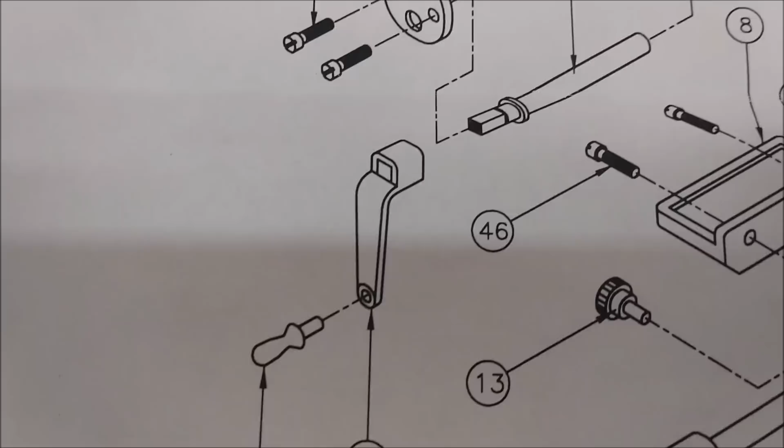Last night I started working on part number 18, this little crank right here in the center. Now, as dimensioned, they're calling out for a 0.100 inch and 93 thousandths on the square. 7 thousandths of an inch doesn't sound like a whole lot, but when you put that together, I just had to roll my eyes and say, what are you thinking?

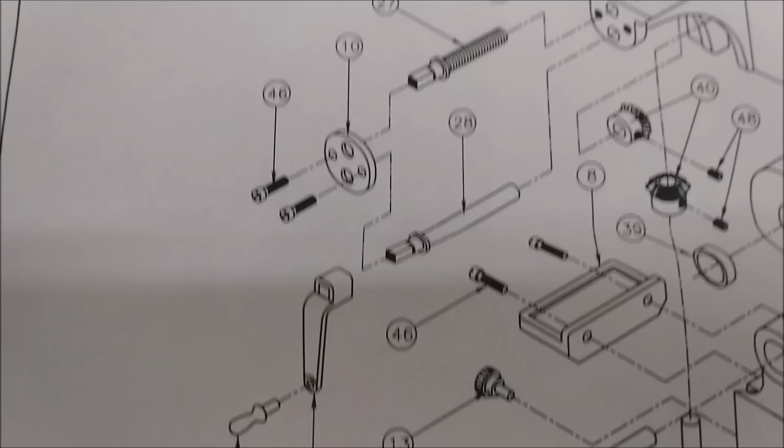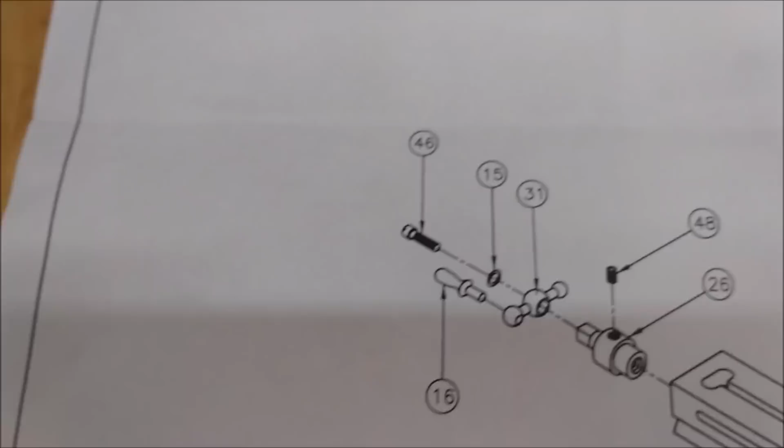So I'm going to show you how it fits, and then we're going to make another one. It's going to be relatively quick, an accelerated video with voiceover, and I'll probably move on to making a pair of 31s at the same time. For those of you that haven't seen how that's done, that's pretty cool as well. Anyway, let's go over to the bench, take a look at how that handle fits on that shaft, and you'll see why I got to make another one. Let's do it.

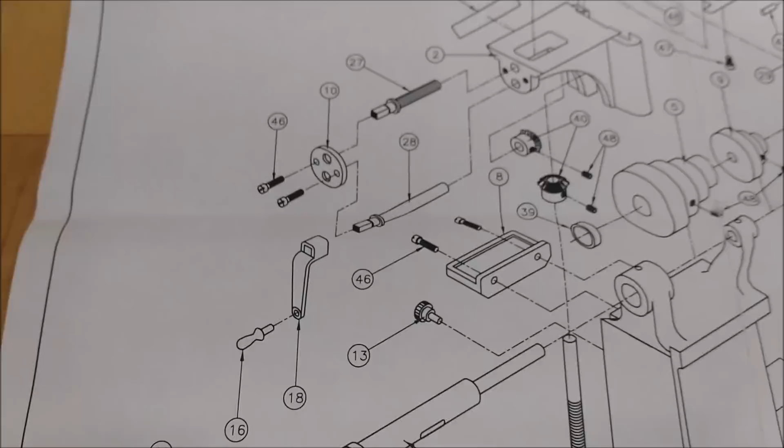Well, there you go. That is a 100 square broach feature, about 200 deep. And that was a Z06 Corvette. You just can't beat that sound.

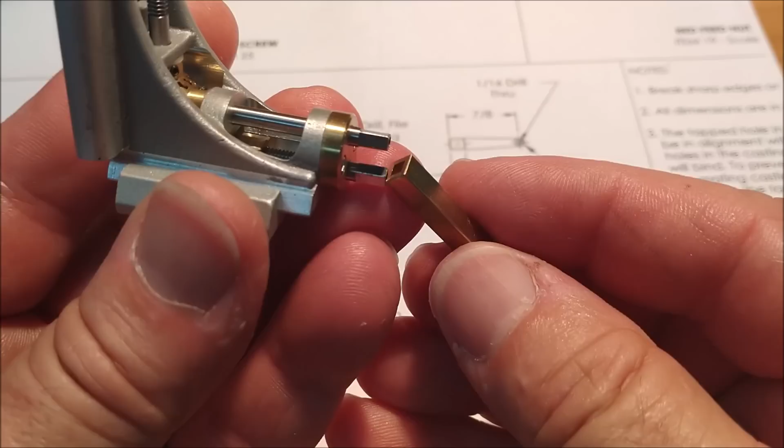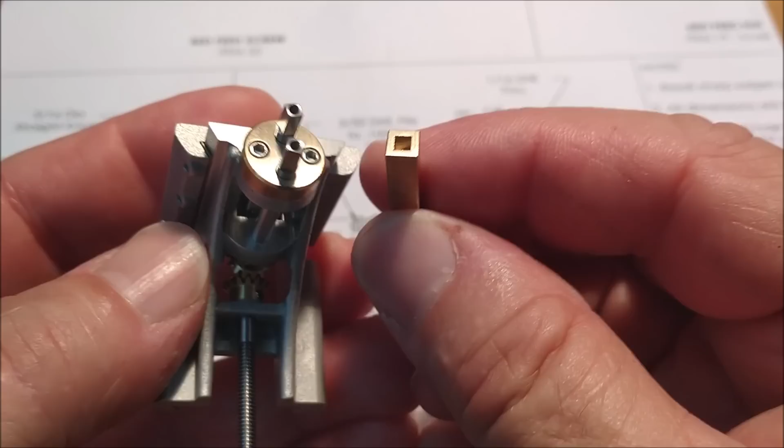Anyway, this goes right on here as the driver once it's all cut and relieved. But you just can't do that. That's just not, no bueno, guys. That's sag - you know, you take away the G and add a D and you got sad, right? So that's how it is. It's nice to test and play with, but at 100 versus 93 on the square, and this is to print, so is this. Just not digging it.

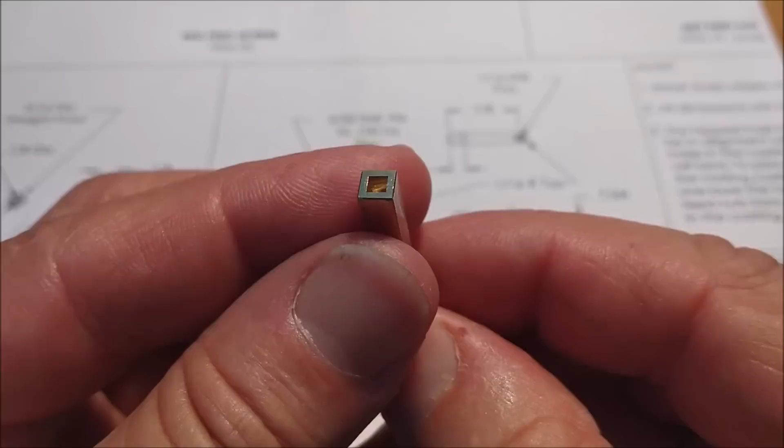So I'm going to make another one at 93. I can use the same broach, but I changed the gauge, and luckily I had some more material left over from a previous model. So let's go over to the mill, squeeze this in a specific setup, drill it, broach it, and then we'll start with all the relief cuts and rounds and such and make some magic. Let's do it.

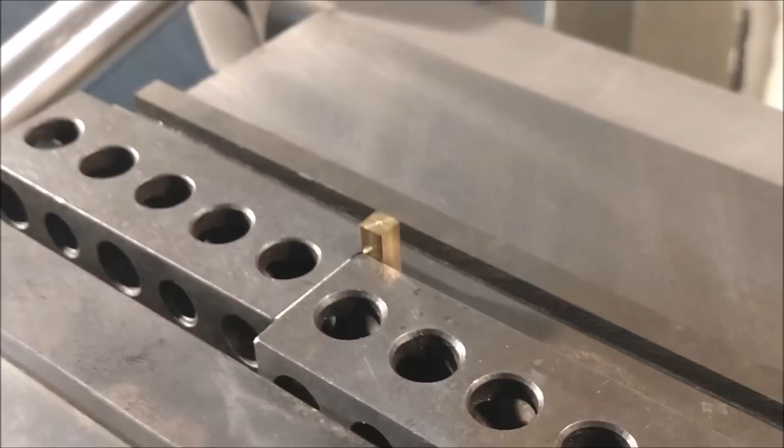Well, to start the process, I'm using a pair of 1-2-3 blocks, one as a vertical reference and the second one as a clamp. All I'm doing in this operation is just cutting the end of the material off. You could also side mill this if you wanted to, but it's nice to have the part oriented so that you can do the most work to it in one setup.

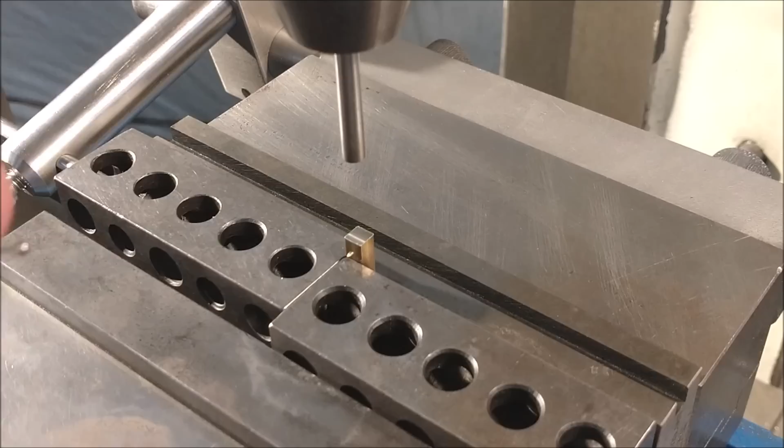Gauge pin in the drill chuck gives you a quick visual reference of how close you are to center with the square material, so that you can get an indicator in there and not be all over the place looking for zero.

Once you register the face, make sure you rock the indicator back and forth to make sure the readings are consistent. Once you have one axis dialed in, if the part is truly square, that's just the number you look for when you move the indicator to the other side. Simply shift the table until you have that number on the indicator, and there you go.

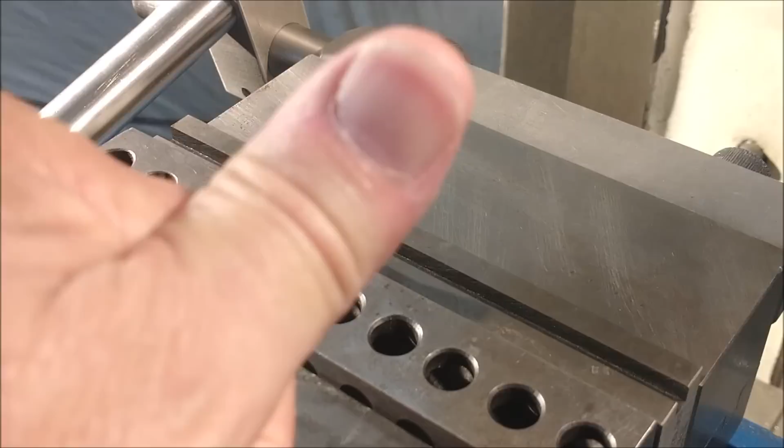Center drill. The drill I'm using here is just slightly larger than the size of the broach. The broach is an 082. That drill was an 089. You can see the little moon shapes on either side. It's a soft material, so it's not a problem with knocking the corners out.

Walking the broach all around, looking for the size that I am shooting for. I'm not sure if this was the 95 or the 94. I do have an 095 gauge, but for the 094 I used a gauge pin, knowing that the profile was square anyway - it just wasn't worth making another gauge. And it fit like a glove. You'll see it at the very end if you stick around right to the end.

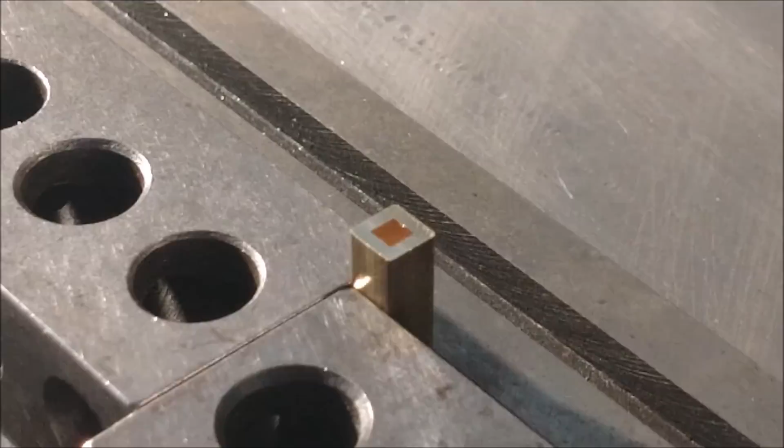I did want to sneak up on it, so I took several passes, making small adjustments each time, because the length of engagement is just too short, and the slightest little bit oversized is going to rock around.

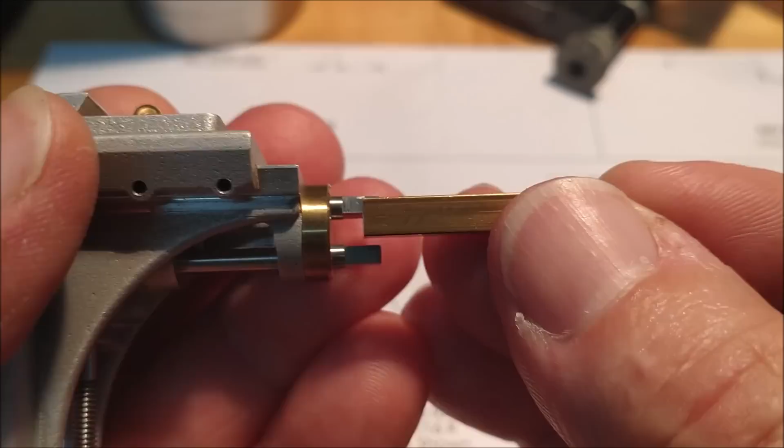Okay, 95. Takes a 95 square gauge. This is 94. I still expect some movement here because of the length of engagement. The smaller the length of engagement, the tighter it has to be in order not to move at all.

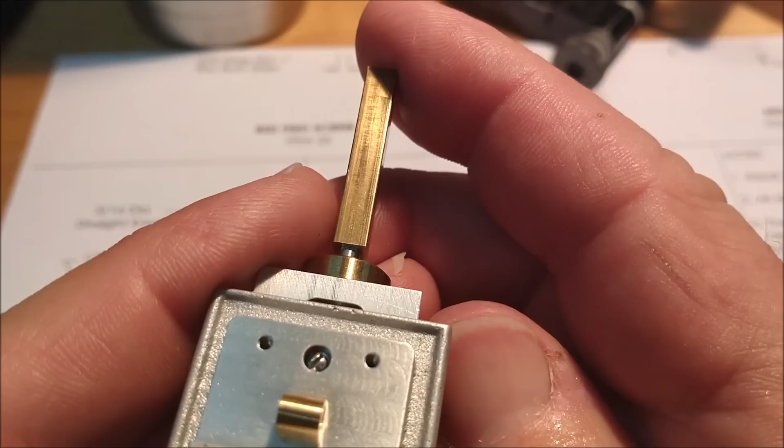So there is still some wiggle in that, and that is to be expected. But it's a whole lot better than it was. As long as it clears the top, clears the bottom, fits them both, we are golden. Let's stick this thing on a fixture plate, neck it down, finish it up.

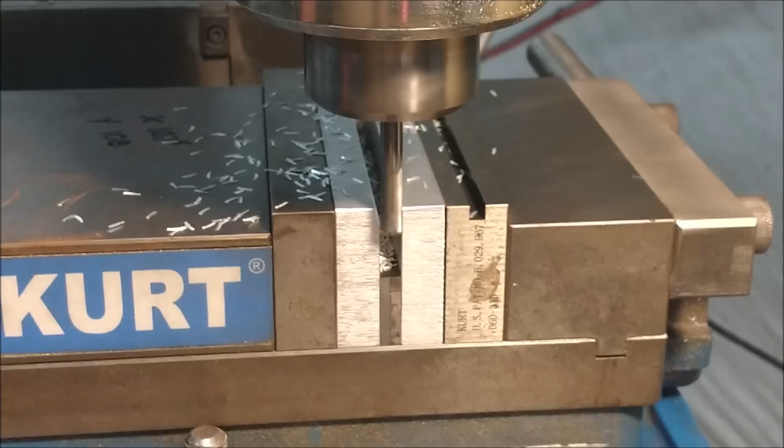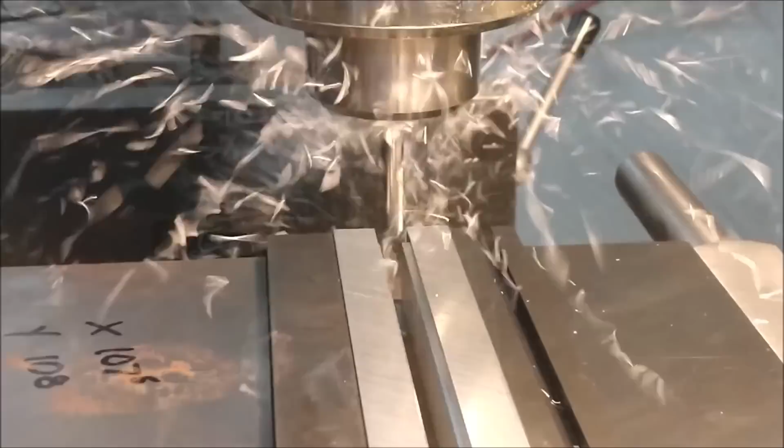I know that the center of this cutter is exactly an eighth of an inch off this back wall. So if I move my cutter, which I will do right now, watch the cutter go that way. I'm going to zero out my Y-axis digital, or your dial, whatever you got. I'm going to go to 125. Go to 120. Let's say 124 and a half. All right, I'm going to zero the cutter.

Excuse me, zero the digital. Right now I know that the center of the spindle is over this back edge right here, so whatever piece of material I put in there, I don't need an edge finder or an indicator to locate the feature that I want to do. And that's going to be a 1/16 hole for the small handle. I also know that the bottom of the cutter against that surface right there is zero. So when I drop the table, I can establish the thickness of whatever part I'm going to put in there. This is also critical. Okay, let's put that little piece of brass in there and see exactly how this plays out.

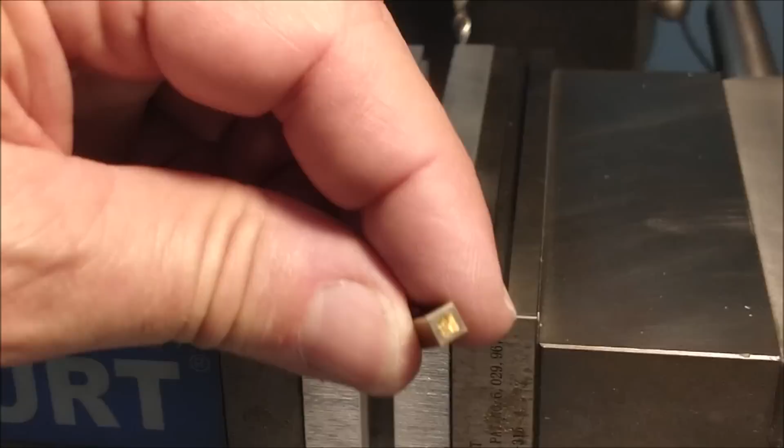If you're going to do something like this, make sure that the top of whatever sacrificial blocks you're using don't protrude above the jaw itself, or they're going to cantilever in and close in a V, and the part's not going to be very secure. So this is just about flush, and the channel itself is just about as deep as the part is thick.

I'm going to lock it in there, and I'm going to leave it locked in there.

The center of this part gets cut down to 43 thousandths of an inch thick. That's pretty small - just over 1 millimeter for those of you that are wondering how big 43 is. So let's do it. Let's drop the table down 43 and call that the new zero for the bottom of the cutter.

For this operation, the cutter was brought down to a quill stop, so I can now safely raise the cutter manually without issue.

And let's get that cutter right directly over that part. I'm going to put some visual reference marks on the part so I can get close before I start taking dimensions.

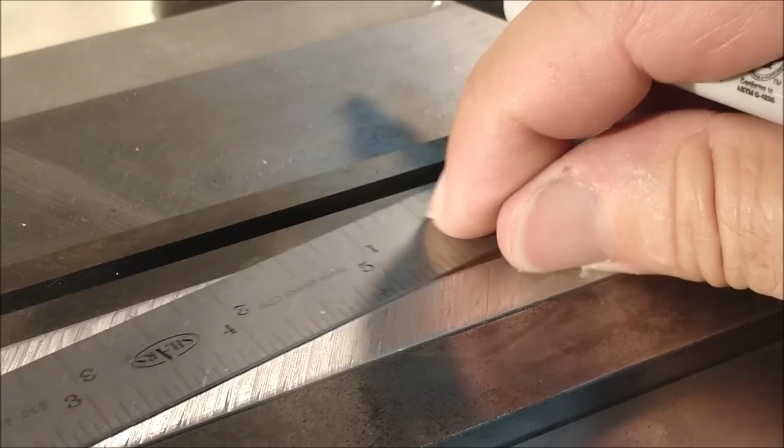Looking for a specific dimension from the end in, and I'm looking for a specific width of that particular slot at the depth preset by dropping the table.

And having the setup like this allows me to go completely across the part into the aluminum. Not a problem.

In this operation, I'm about 5 thousandths shy of where I want to be on the depth of this cut, and I'm just going to push right through the center of it, establish a clean surface on the left-hand side of the part so I can measure it and figure out how much farther I have to go in order to set my zero and my shift locations.

Knowing the diameter of the cutter and the thickness or the width of the channel to be cut, all I need to do is subtract the diameter of the cutter from the width of the slot and just move the table that much.

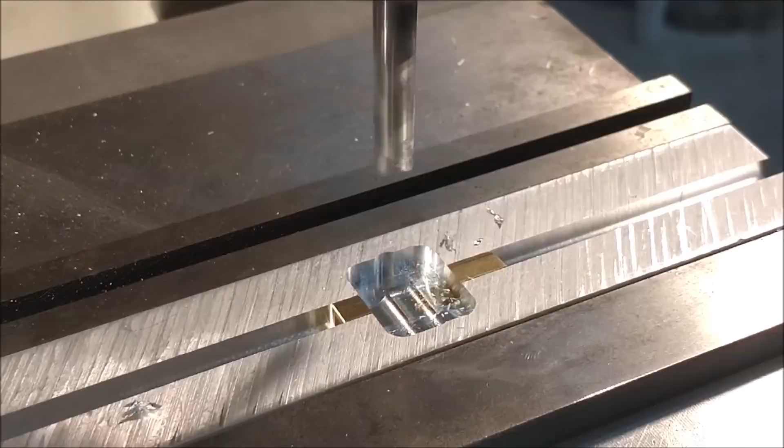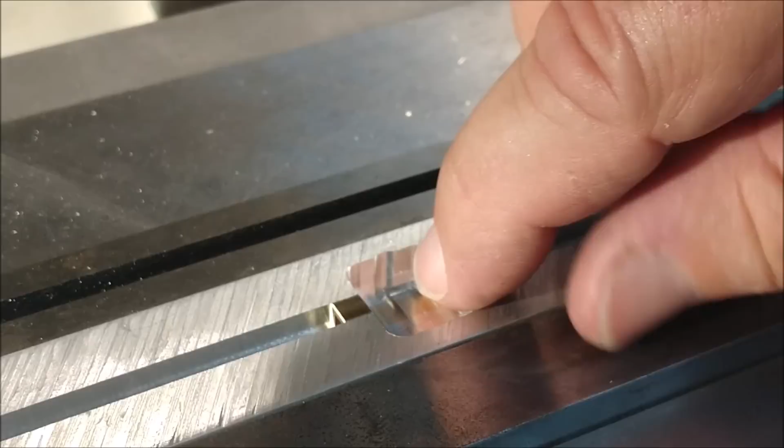I am not going to open these jaws at this time. I'm going to put the crank handle hole in, and possibly use the trepan tool that I used on the little mini U-joint to put the elevated round boss in this area right here. Right now that should be 43 thousandths thick on the bottom and 188 from the face to the inside.

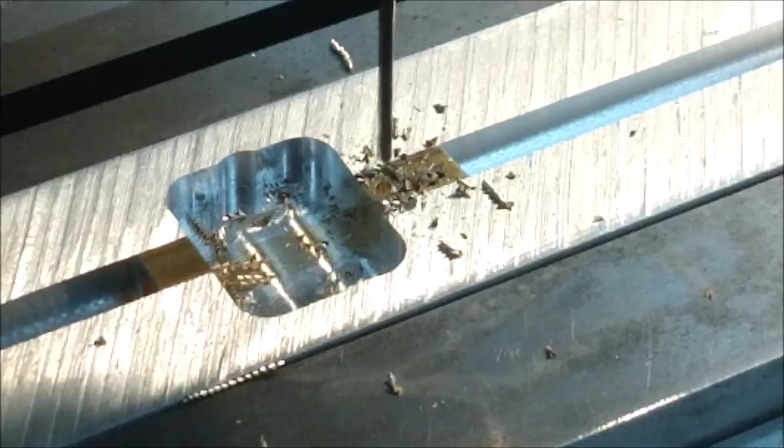625 across here to here. Next step after the pocket is to put the little handle hole in where the knob will go. Center drill first, ever so slight dimple. This is an 059 drill. Gonna go with an 063 reamer to follow. Half the speed, twice the feed.

This is the trepan tool that I used for the mini U-joint. I'm going to just keep on going down until I can see a scuff mark on that nice clean channel that I have in the middle of the part. Might be a little hard to see on film, but when you're sitting right on top of it, you can see the little scratch halo.

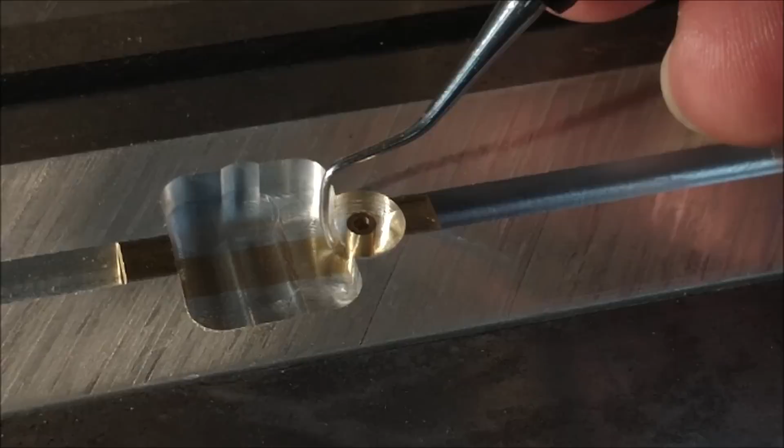The final element I'm going to do here is reduce the height of that boss right there and remove the majority of this stock so I don't have to file it away. We'll go from there.

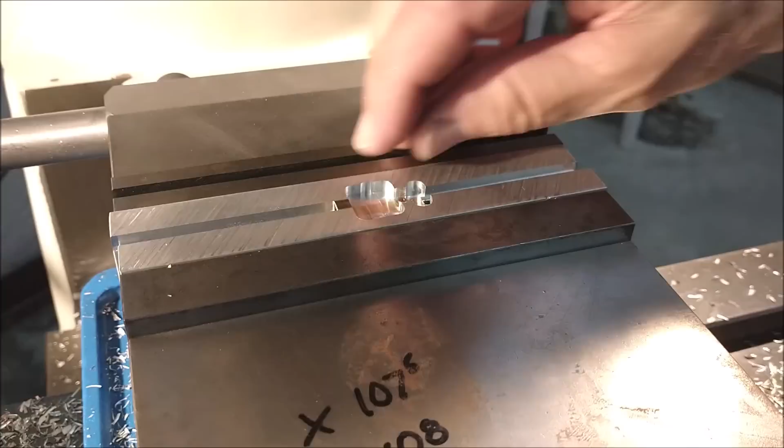All right, let's take a look at it. Still got to put the tapers on the side, bend it. Let's take a look, see what we got.

All right, see, we're right there. Getting close. Let's do some filing. Bend it. Heat treat it though too. Definitely take a torch and light it up cherry red, make it glow, or when you bend it, it will crack. Been there, done that.

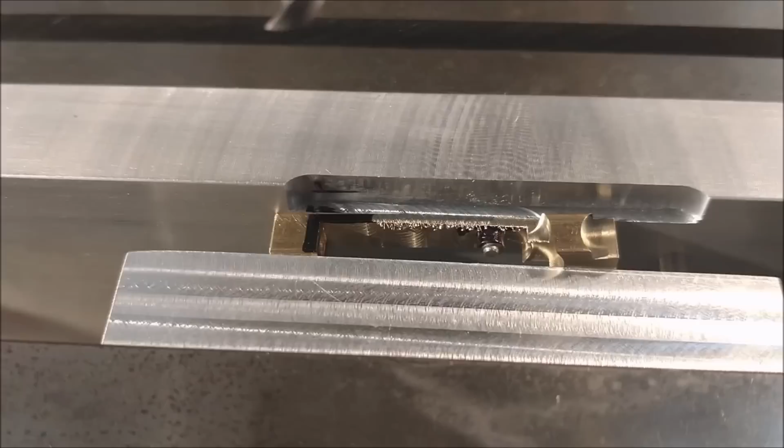Okay guys, I'd like to throw an inter-project note in here. I did make several of these, and on a couple of them, I left the end material on beyond the small round boss, and that proved to be very helpful when putting the side angles on. So if you can, since that boss is a little bit shorter than everything else, and you don't want to shorten that after the part is relieved like this, leave the waste material on the end, then cut it off, then round it off. The sequence is much better that way.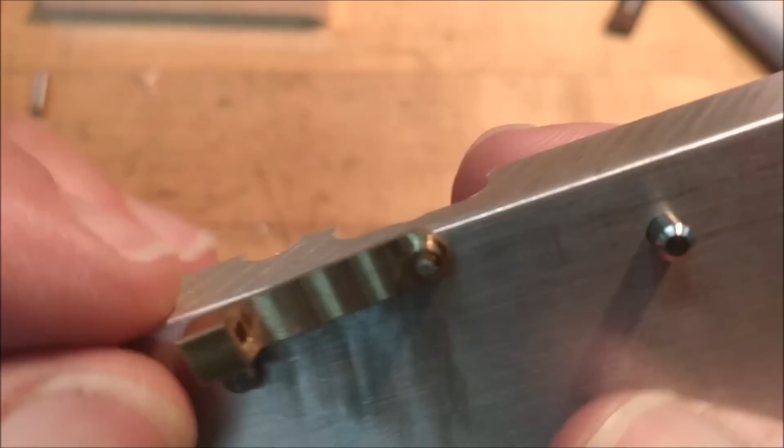All right, now to put the angle on the outside of this little crank, I'm going to go tangent to this boss right here and tangent to the circle. 3-pin fixture. First cut here. Second cut there. Should be the same height if my math was correct. And if you do something like this, make sure that you put your banking pin on a surface that's not going to be milled away.

That could really change things up a little bit. I will put a little push bar in here, and if I have to mill into that, so be it. Let's put it back in the mill and have at it.

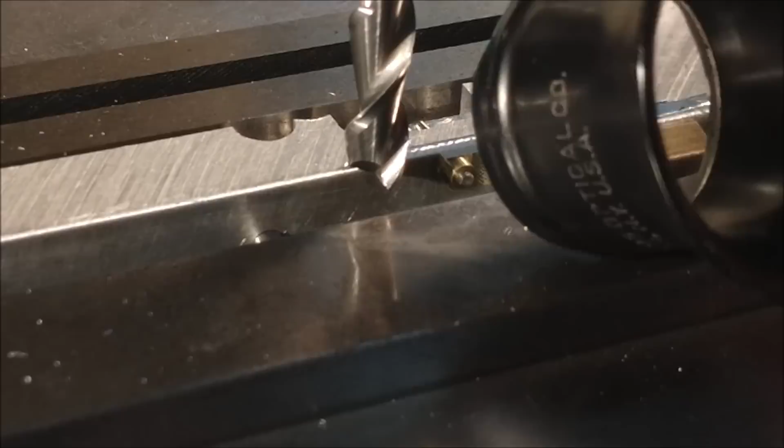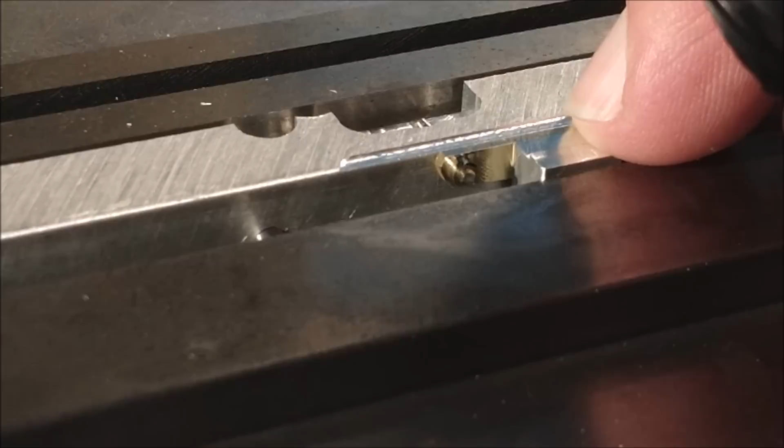That is really hard to see, but I was looking for a tangent between that plane I just cut and the outside of this cone. And I think I got that. All goes well, all I need to do is flip this over and repeat this process on the other side, then we'll take a look at it on the bench.

With both sides of this correctly angled and cut off in the saw to the length, the boss is there. You could file those little corners off right there to blend it in if you wanted to, but there's something that I want to try.

So I've got this set up in the lathe, and I'm going to put a tool in the tool post, and I'm going to use it like a little bump shear, and I'm going to see if I can round that off with the lathe. Not running, of course, because that would be a little hard, but let's take it over there and I'll show you what I'm talking about. I know it's overkill, but I got to try it. Let's give it a whirl.

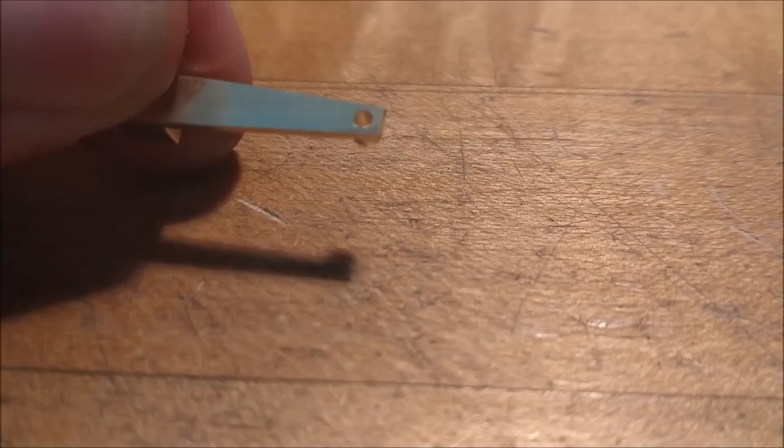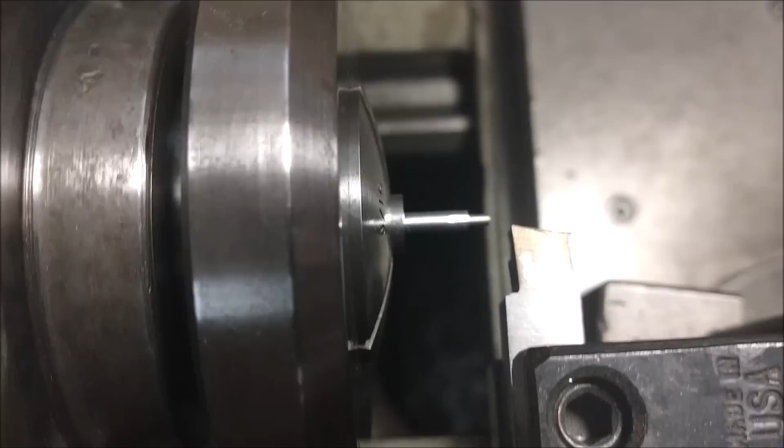The gist of this setup is the tool is set 90 degrees to the way it would normally be positioned for turning. That way, as it moves, it'll act like a scraper for the material I want to remove. I'll be able to adjust the diameter of the material I remove simply by moving the compound or the cross slide in and out.

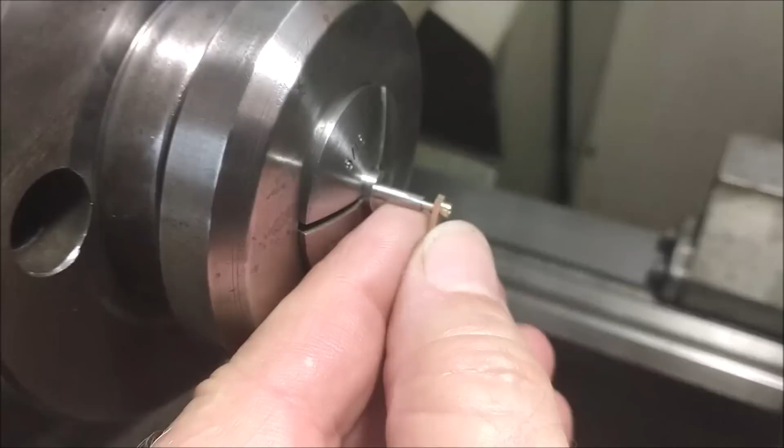Now this particular arbor I have set up in this collet, the larger diameter is the size of the boss on this piece, and that little diameter is where the part's going to hang from. I'm looking through the camera, it's kind of hard to do this. There you go. All I need to do is set the tool up against that little diameter and move the carriage in and out, taking a bite each time, and I should be able to round that tip off just fine.

Don't know if I'm going to go all the way flush. I could probably finish it with a file or rub it on some emery and get it right, but let's set the camera in there and take a look at this, see if it works. Well, I know it works, I just want to show it to you.

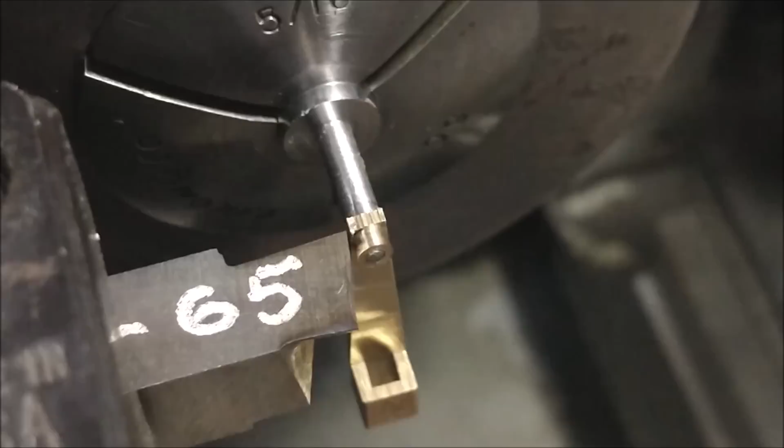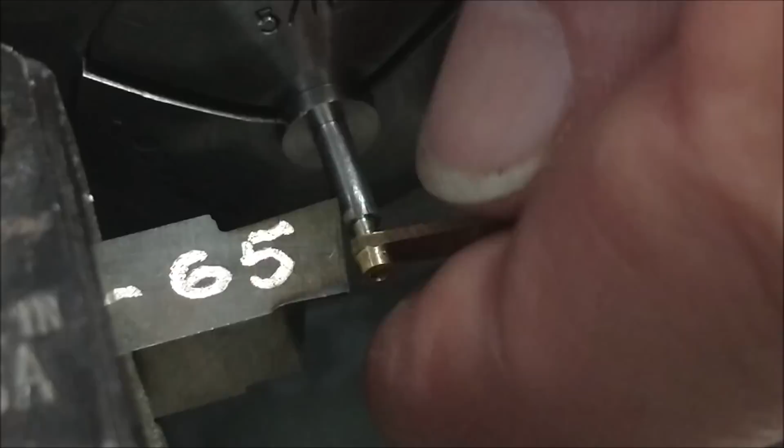During an operation like this, do not move the part until you retract the tool, or the part is going to have to be pulled off the arbor. Trust me, you'll see me do it here in a second. If you're blending two flat surfaces, make sure the flat surface is positioned vertically with the face of the tool as your final pass, or you'll end up with another dig mark along the length of the outside of the part.

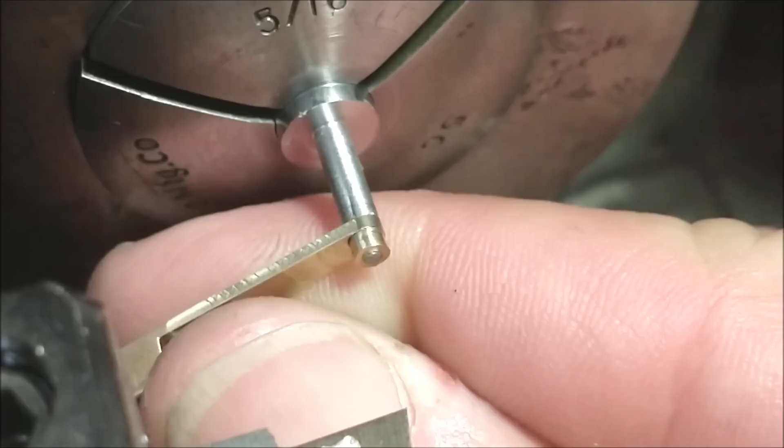Not bad, huh? I like it. Gonna move in just a little bit more. Push my luck just a hair. Finish it up.

There you go. I think with minimal blending that'll turn out really well. It'd take a little bit more off, but why push your luck, right? Well, then again, why not push your luck? Let's do it.

Well, that's not much. Not worth pushing. I'm going to file from here, then bend it. Let's do it.

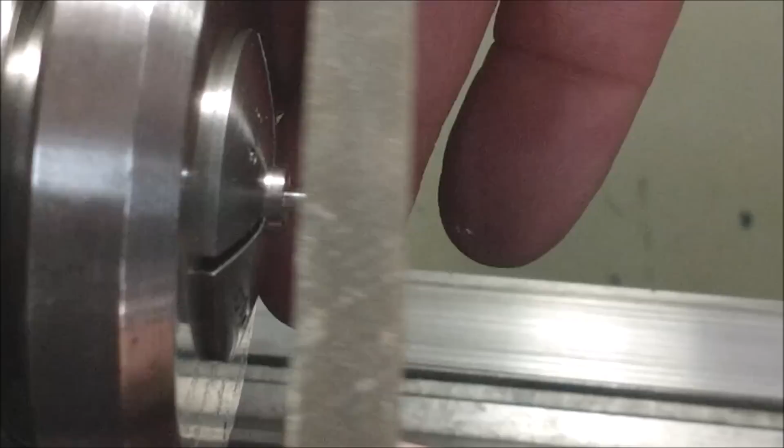This particular arbor can serve quite well as a guide for a file to finish the job off. Registering the file on the turned diameter, just apply very gentle pressure until the file flattens out, and you'll come up with a nice end on the part. So here we go.

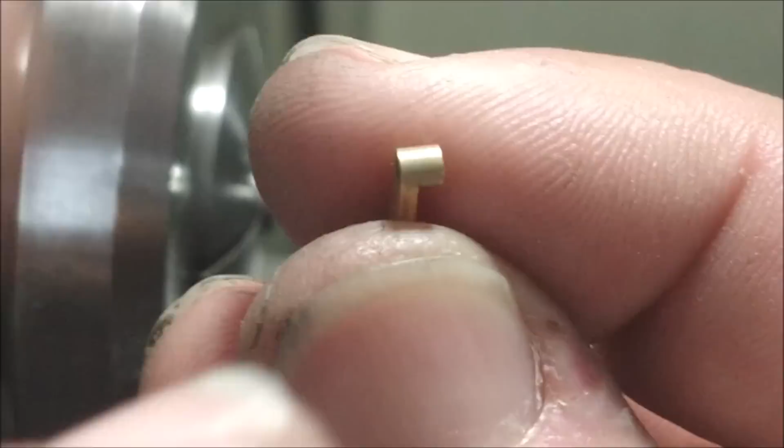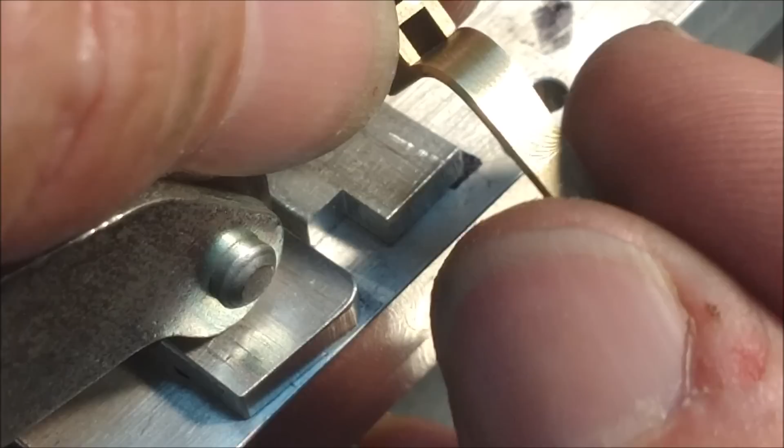After heating the brass parts to a moderate cherry red, not too much, you don't want to go too much on it because this is real thin, it'll melt. This is .043 thick, just a little bit over 1 millimeter. This is the nest that I made to bend them.

The top shim simply anchors the top profile of the part, and the bottom one creates the radius and the starting point for the radius, sanded onto the profile of that particular shim. You do have to overbend it slightly because there is some bounce and memory in this material. But when you're done, that's what you got.

I was lucky enough to have 2 of them survive this time. Last time I did this, I did not heat it, and they snapped right off. That was a real heartbreaker. Although this is not the component that goes in here, you get the idea what that little guy looks like when it's done. This will be steel.

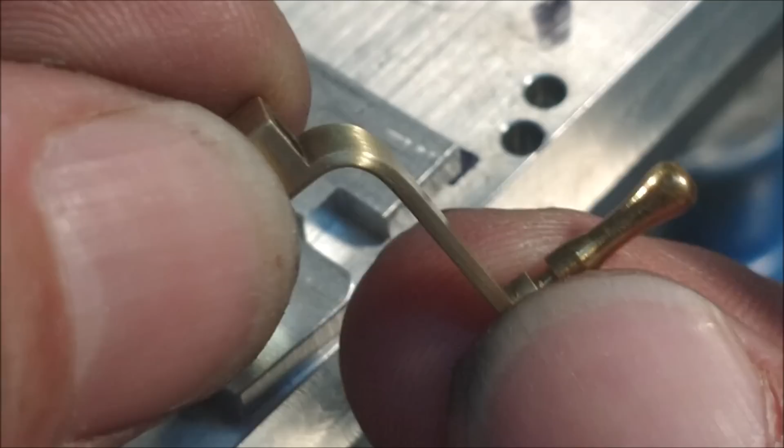So there you go, an awful lot of work for another part that's going to be completely overlooked at assembly because it looks like it belongs there and looks like something you bought in a store. Well, that'd be an awfully expensive part if you bought it in a store.